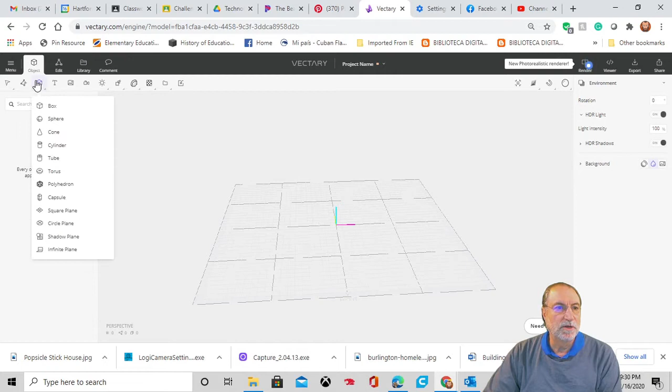So first thing we're going to do, click on create a new project in Vectary and get rid of this, turn this around to the front a little bit, and we're going to come over here to our objects, to our primitives, and we're going to get a torus. And we're going to get a pretty chunky looking torus because it only, I think, has 10 segments. So that's the first thing we're going to do.

We're going to adjust the tube segments, and that's the segments that go around the tube. So we're going to bump those up to 30. That'll give us plenty to get started with. And then our ring segments, those are the segments that go around the ring. Then we're going to bump those up to 30 as well. That'll give us just enough to get started.

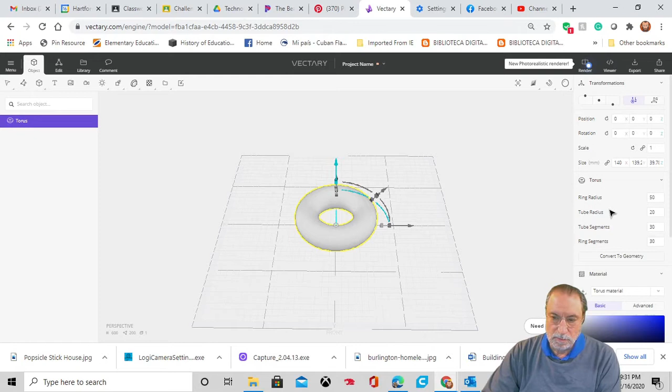Now, we need to pull down, I got some cheater notes here too that I need to look at. I almost lost them. Okay, we need to pull down our ring radius to about 40. So we're going to get that down to about 40. And we're going to push up our tube radius. That's how wide the tube is. We're going to push that up to 28. And that'll give us this little fat looking bagel-y type of thing here.

And right now, it's pretty close to where we're going to be. But next step we're going to do, we're going to take this down. We're going to leave it constrained. We're going to take this down to 102 millimeters, because we want it about 4 inches. And remember, 102 millimeters, right about 4 inches. So let's grab this, take it down to 102. That'll bring this down. So let's make sure we unconstrain now, change this to 102.

And then we found that this is really good at about 36. Gives it that kind of flat, donut-y look. And we're starting to get right to the point where this donut looks pretty good. We just have to square off these shoulders a little bit, and then we're going to start adding some texture to it all the way around.

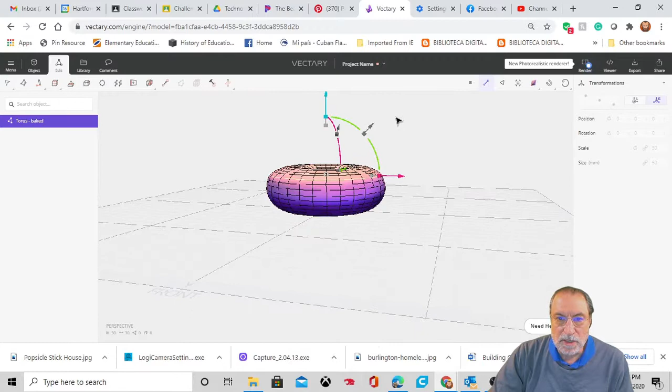We don't want to pull it in different directions, because then it'll make it look kind of funky. So right now we're starting to get that squareness. So now let's go up to the next line. 1, 2, and then we're going to grab the box. We're going to pull it as straight out as we can, and that will give us more of that squareness.

So let's go back to that one line that we didn't really pull out yet. Control those, take a look from the top, and make that come out a little bit. Just a little. There we go. Just to get it to move a little. Now we're getting that kind of a shoulder.

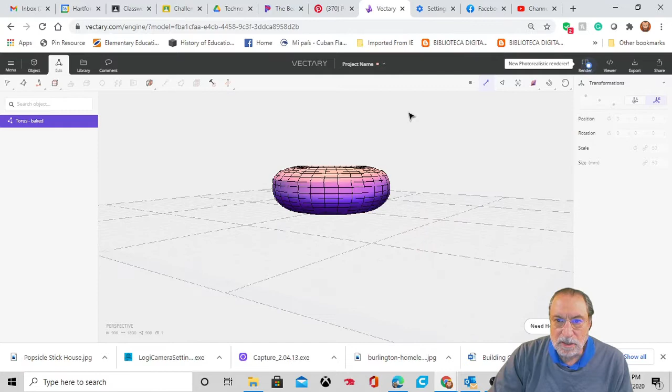So now we just have this line right here. We've got to make sure that we're selecting lines. Right now it's trying to grab vertices. So there we go. There's a line. So we want to get this one right here, this series right here. So we're going to click on a line, click on the next line, and I think we're going to pull this up just a little bit.

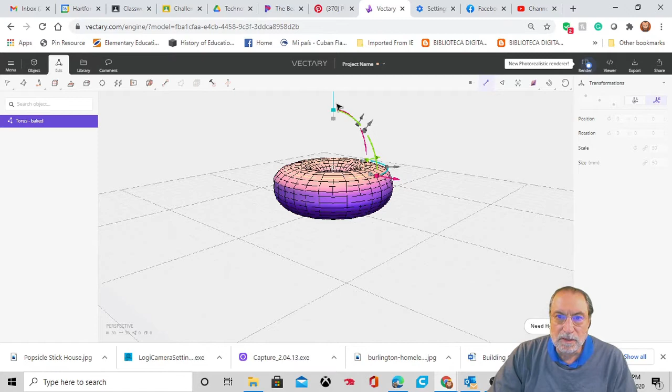Okay. Did that grab all of them? No, it didn't. Control Z. So I want to grab this line and hold the control key and grab that line. There we go. Now I'm going to pull that all up just a little bit. There we go. Now, I'm kind of happy with that. That looks nice and squared compared to this really rounded section. So I think that's going to fit more with what we want to do.

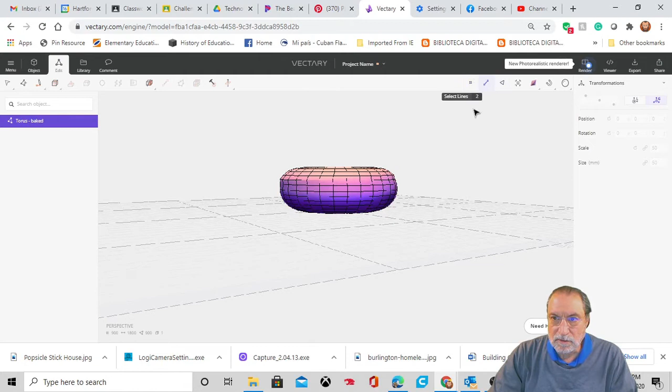So let's take a look back in our edit. Got a few things we got to do. I think I might want to pull this line out more here. So I'm going to click on lines. I need lines here, not vertices. Lines. Click on that line. Click on this line. I'm holding down the control key, and I'm getting all those lines.

Okay, now I want to push this out a little bit. So I'm going to come up to the top. I'm going to grab this little box, and we're going to push it out just a little bit. Right about there. Okay. Yeah. It looks pretty good in some sections, so I think we're going to go with that.

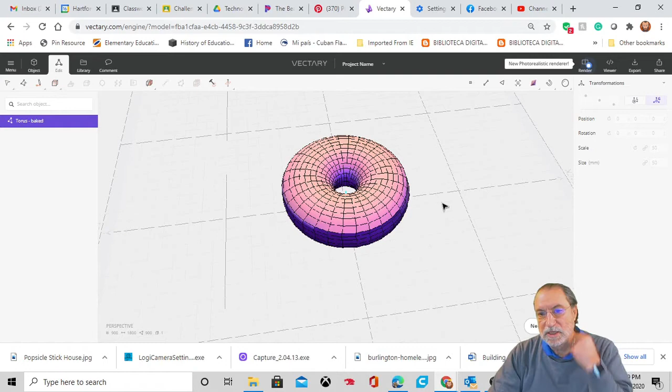Okay, so now that we have this side done, we have it kind of squared out. What I want to do is start working on making this kind of look bumpy, because when we look at doughnuts, and I don't have one up here right now, you can see that they're not just misshapen, they're misshapen randomly all around. They also have kind of a center push in.

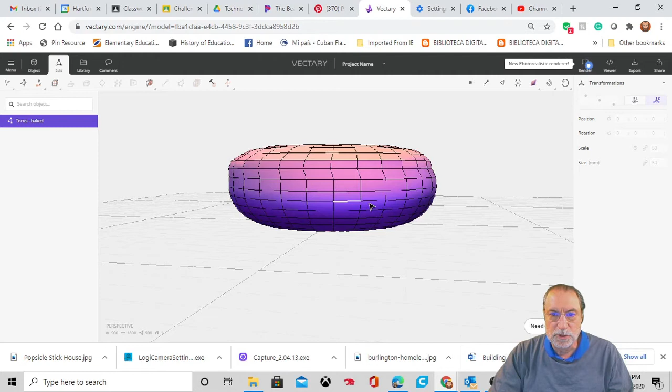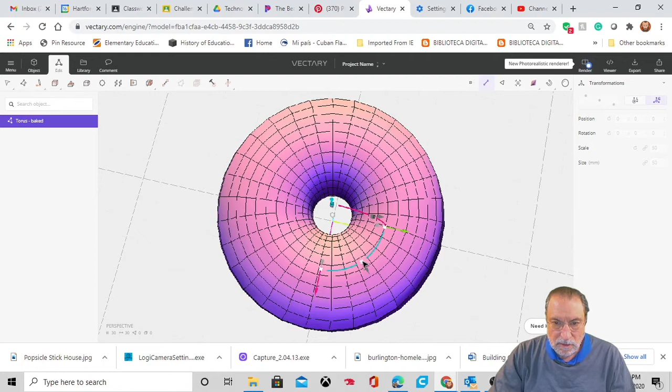So we're going to take this line here and hold down the control key and grab all of it. That's that center line. So we're going to come here and bring it in just a little bit. We're going to shrink it a little bit by grabbing that and pulling it in a little. See, that's way too much. So let's Control Z that. And let's see if we can pull it in just a little bit.

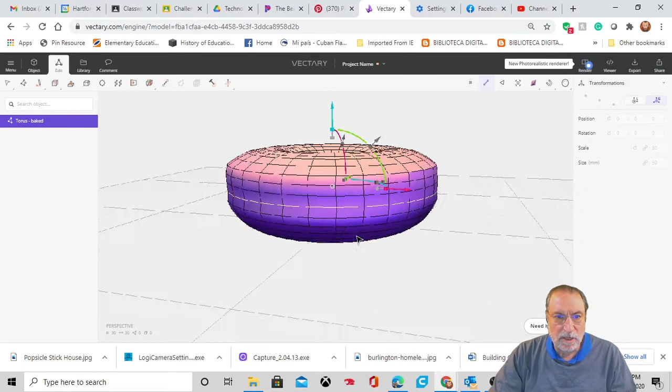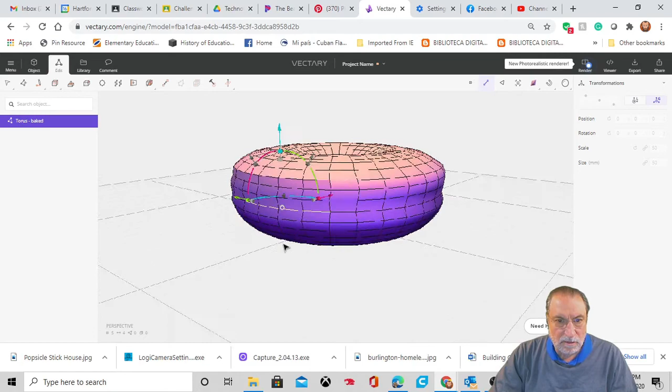And that's better, okay? So we got that pretty much all the way around. Let's come over here and grab this side and bring this side in a little bit more, because it looks like we could just pull in a few of these over here on this side, and that'll make it work. That's good. I'm happy with that. Now let's get a couple of these coming out a little bit.

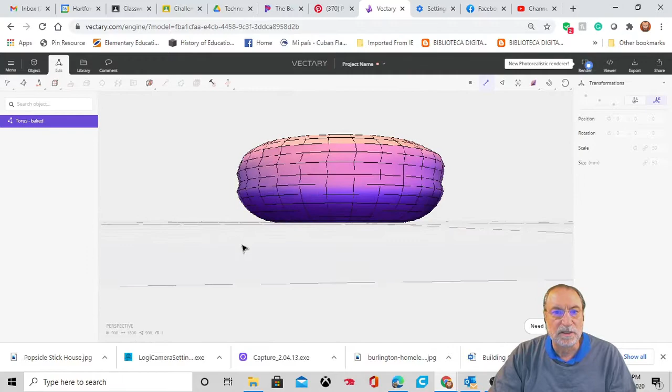Okay, and just pull that out just a little. Good. Now I like that. That's a much better looking donut at this point. All right, so now we've got our little ridge around the middle for most of it. We've got some squareness going on at the top.

Now we're going to start working on vertices, and we're going to start with everything at this level of complexity. We're not going to do a subdivision yet. So we're going to go to vertices, and we're going to start grabbing vertices. Now I can grab these one at a time and just pull them up a little bit. Grab another one over here, pull it up just a little bit.

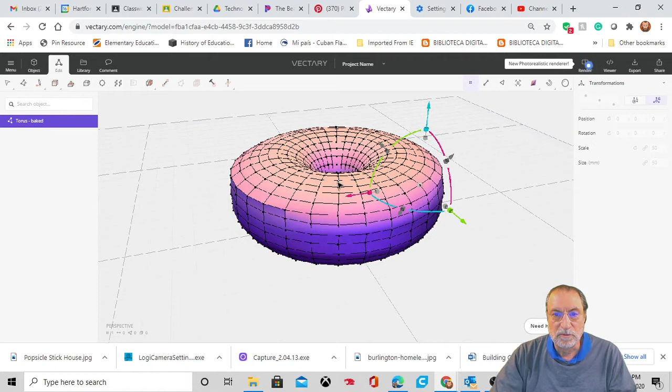Or I can grab them in groups. So I can grab a couple of them at a time, and I can do that by holding down the Shift key and then pulling them up in a small group. Now most of our movements here we want to keep relatively small. We don't want to have huge bumps all over the place.

So part of this is kind of dealing with how much you want this to look bumpy. And you don't need to do a lot to make it look bumpy all over. We'll take a look in object mode now to show you. You'll start to see that the top is starting to get misshapen.

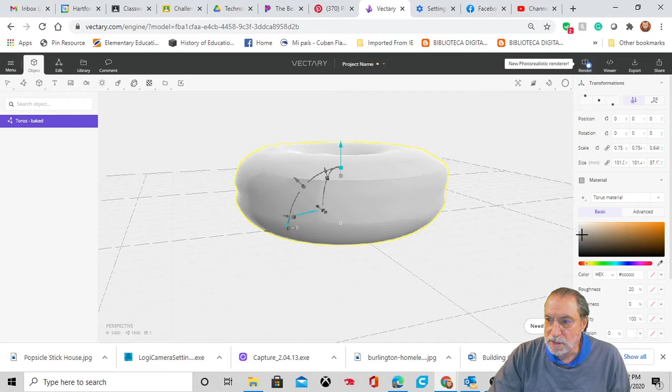I can show you better if we turn the color into more of a donut-y color here. You can start to see that we have some bumps and indentations and things like that. So pop back into edit mode. Let's do a little bit more deforming here. So again, we want vertices. We can get that also by just pressing the 1 key, and that'll give us vertices.

So we're going to grab some random locations here, and we're just going to pull up a little bit, move over here, do a couple more. You'll notice I'm just doing a couple of small moves. I'm not making anything crazy. Just slight movements up to give it a little bit of texture.

Now, if you want your donut to be really textury, you can really yank up on this and pull it way up. So that'll give you a lot of texture. I'll give you a look at what that looks like. We come back in here. You can see that gives you a lot of texture. So in edit mode, probably going to bring these down a little bit. I just want to give you an idea of what they could look like.

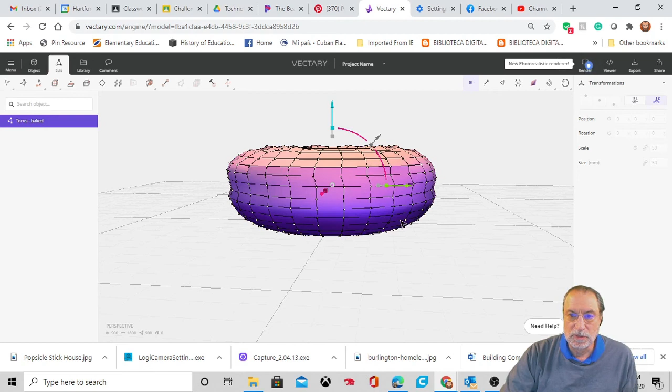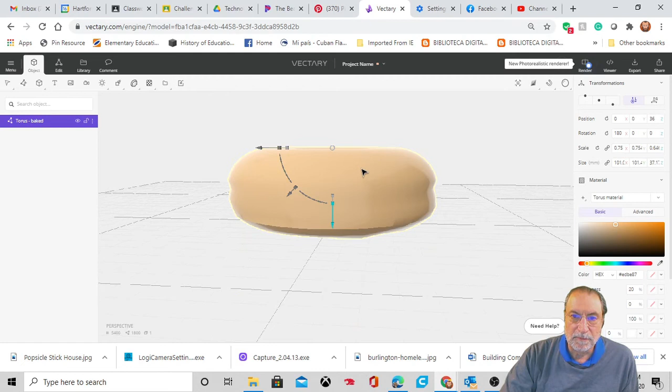Now, once I'm happy with the level of texture, and that's not just on this side, but also on the other side, I want to work on the other side as well. So I'm going to rotate this 180 degrees. And since I know that it's 36, I'm going to change it to 36 on the Z. Now I can work on this other side. And when I want to go back to the first side, I just go back to 0 on the rotation and bring the Z back down to 0.

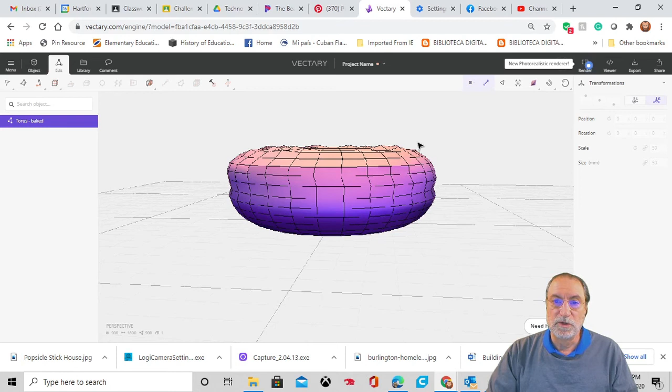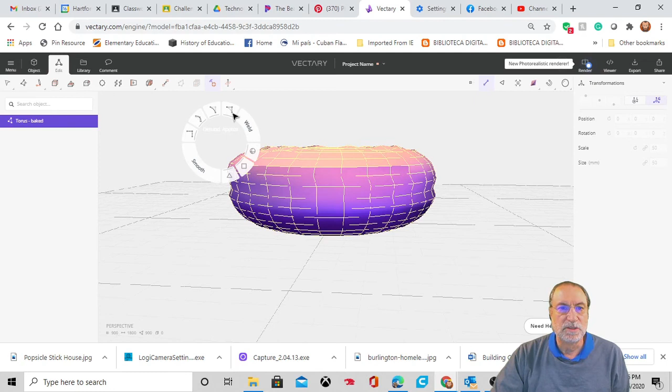So the next step here is I want to get this looking a little bit smoother. So I'm going to go into Edit, and I can either select lines or faces or vertices. In this case, let's say I select lines. I do a Control A to select all the lines. Then I'm going to come up here to Mesh Tools. And what I want to do is a subdivision approximation. What that'll do is it'll take each one of these boxes and turn it into 4 boxes. So I'm going to do a subdivision approximation.

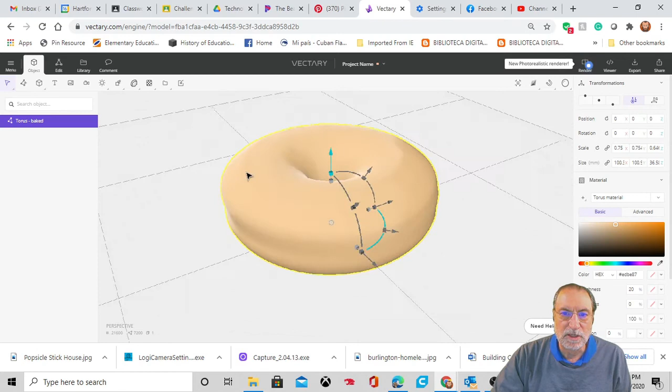Now I have more boxes. And if I go to vertices, you'll see I have more vertices. Now I could do more detailed editing. And when I go to object mode, things start to smooth out a little bit more. We're going to do one more subdivision approximation later on. But right now, we're doing pretty good.

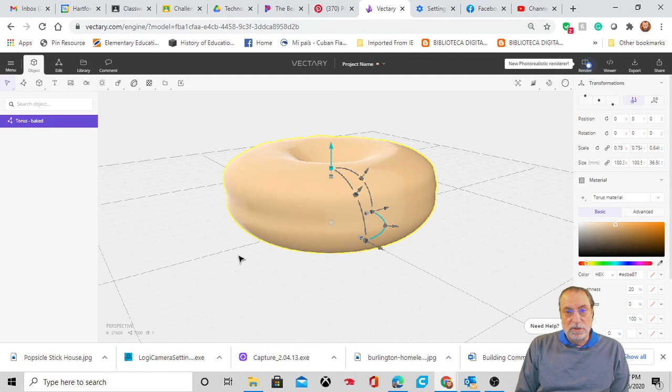So what I want you to work on for the rest of this part of the Let's Bake Some Donuts challenge is texturing both sides to the point where you're happy with it, that your donut looks like it's pretty real, it's ready to eat. And our next video is going to go over how we're going to make icing to cover this.